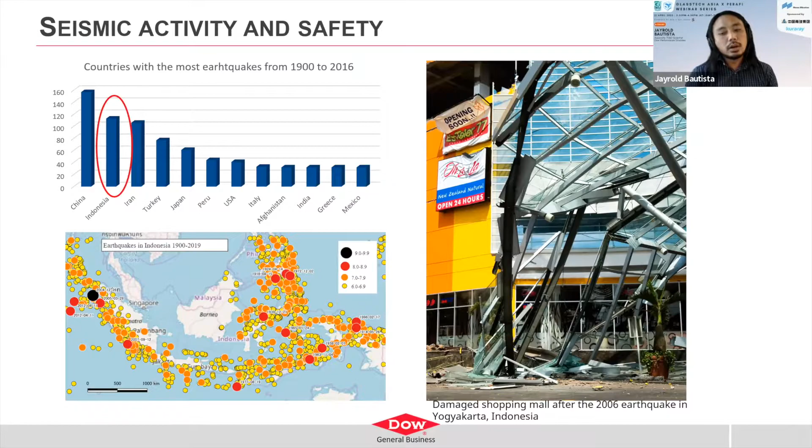And truly, in modern times, there has been less and less major building collapse, especially in the urban areas. But still, we have to look at not just the main structural components, but also the non-structural components, like the facades, because they can also have some damage during earthquakes, just like what you can see in the slide right now, wherein you can have visible damage on your facade. You're talking about gasket dislodging, maybe glass dislodging as well. You have glass breakage or glass cracking, and sometimes even some glass falling from the facade itself. So these are some of the things that you should be looking at as well, and not just the main components of your building.

Now, if you look at the seismic design of the building, the weight of a structure that you are designing for seismic is directly proportional to the seismic loading that it's going to have. Building structures are heavy, and the response is influenced by complex vibrations. A lot of the main structures right now are concrete, and concrete is not really a very good material for seismic design. So typically you'll go to technology, let's say some dampers, to make sure that seismic loads are better managed.

Now, the glass facade, relative to the main structure, is lightweight, and it is influenced by the building's main structure when it comes to seismic loads. With seismic loads you'll have the in-plane loading, and also the out-of-plane lateral loads. These loads are coming from the P waves from the earthquake, which make buildings shake up and down. And earthquakes will also have their secondary wave, or S wave, which makes buildings sway from side to side. So you can imagine how these waves are going to interact with your main structure and how they're going to affect your facade.

Now, the main idea about seismic design for buildings is that you should isolate the facade from the main structure. So how would you do that? You will design your facade joints to be able to accommodate those movements when there's a seismic load. And then also, of course, your connections. You're going to have some slippage on your connections to ensure that there is that isolation of your facade from the main structure. Now, the other thing, of course, is that you put those theories to the test.

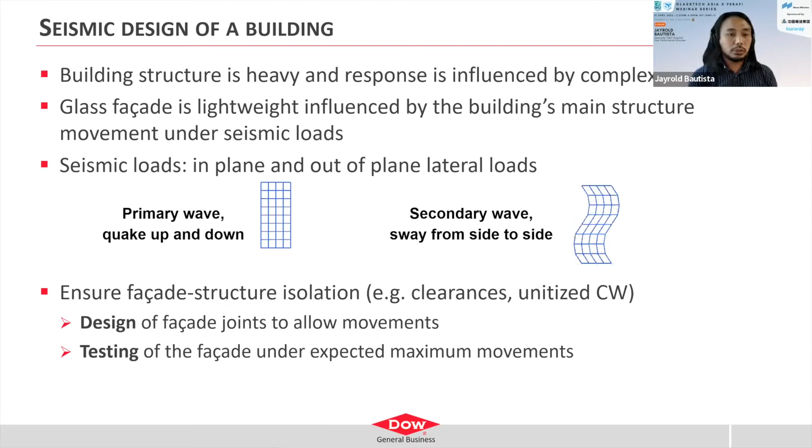So it's also very good that you would put or test your facade under those expected maximum movements so that you'll be able to mitigate those assumed loads that you have regarding seismic. We can look at the design codes, and Valerie can talk about the design loads for the United States and also for Europe. Yes, indeed, Jayrold.

So there are different building codes that can consider seismic action. In the US, we have two such important documents. It's an area prone to earthquakes. We have the American Society of Civil Engineers standard that calculates the horizontal force on the non-structural component and assesses the glass fallout seismic drift, so the displacement that needs to be larger than a certain limit.

Then we have also the AAMA, so the American Architectural Manufacturers Association standard, the 501.6. It's an often used testing standard that we use a lot within Dow. It's characterized by the excitation type on the bottom left of your screen. So you see it's a monotonically increasing amplitude, sinusoidal drift cycle, and it determines the serviceability and the ultimate drift limit for the glass.

The way it's tested is based on a worst case scenario. So you're going in your mock-up to choose the largest glass, the thinnest glass, the most fragile one, the smallest clearances, largest drift index, and so on. And then with this test, you can assess different key design elements of the curtain wall system, such as the SG joints, so the structural glazing joints, the drift, and of course, the primary objective is to determine if we have a glass fallout limit that is within the tolerated value.

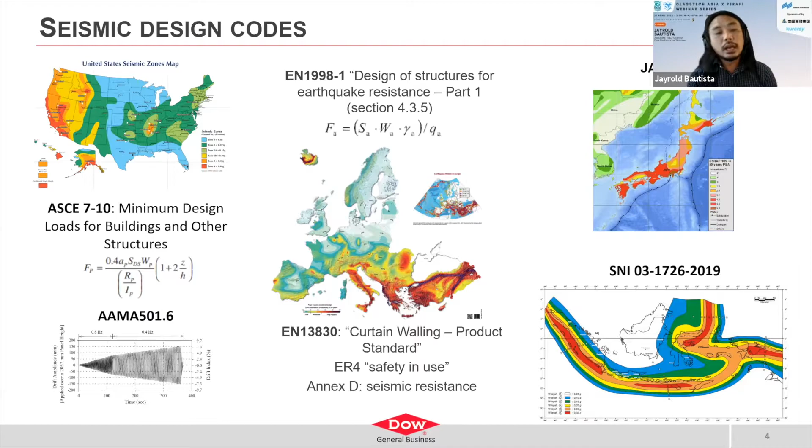Right, and now going more towards Asia, so some of the more popular ones, we have JASS 14, which is from Japan, and it's for curtain wall itself, and this one talks about levels of deformation on the facade itself, depending on the strength of the earthquake. And then if you look at more locally here in ASEAN, for Indonesia, we have SNI 03-1726, and I think the latest version is the 2019 version, and a lot of this loading is based on ASCE 7 as well.

We look at the different systems used for glazing. One of them, of course, is captive systems. Now, the more inflexible our facade system is, the more potential it is for damage due to seismic loading. So damage typically happens when there is incompatibility between movements of your building versus the movement capabilities of your facade. So for example, if you don't have enough joint widths to accommodate those movements, if you do not have enough slippage, as I mentioned a while ago, in your brackets, in your facade itself, it's gonna cause some problems for your facade.

So if you look at glass itself, if you have framing members and you have a system that is rigid, your glass is very prone to impact from the framing systems on the edge. And because of that, you may have some glass cracking, or even worse, you may have some glass breakage as well. So if you look at all of this loading, you have your out of plane loading, you have your in plane lateral loads for your facade, and truly one of the good things about modern times.

Now there's a lot of buildings that use unitized curtain walls, and unitized curtain walls are very good when it comes to accommodating, of course, provided that they are designed properly. If you look at unitized curtain walls, the P waves of an earthquake, so that up and down shaking from that earthquake, that's taken care of by the stack joint in your unitized curtain walls. Your out of plane loading is taken care of by your rotation in the mullion area, in the brackets of your curtain wall.

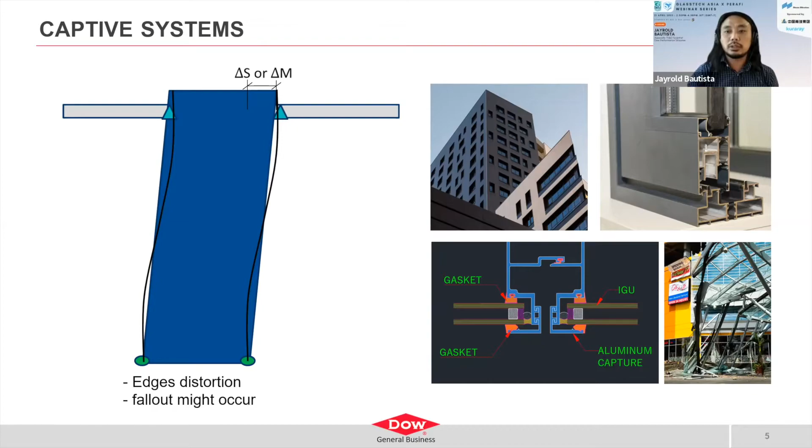So as Valerie will show on the next slide. Yeah, indeed, silicone structural glazing or bonding offers you a very interesting movement accommodation capacity that can really contribute to improve the performance of a curtain wall that is exposed to seismic activity. And that can be related to the structure itself of the silicone.

So we have extra flexibility in the glazing perimeter. We can reduce the stress concentration in the glazing and really distribute the stress more homogeneously. Another benefit is that our modulus in shear is typically less than in tension. So it means that you are going to accumulate less stress in those shear deformations than in tension, which is also a benefit.

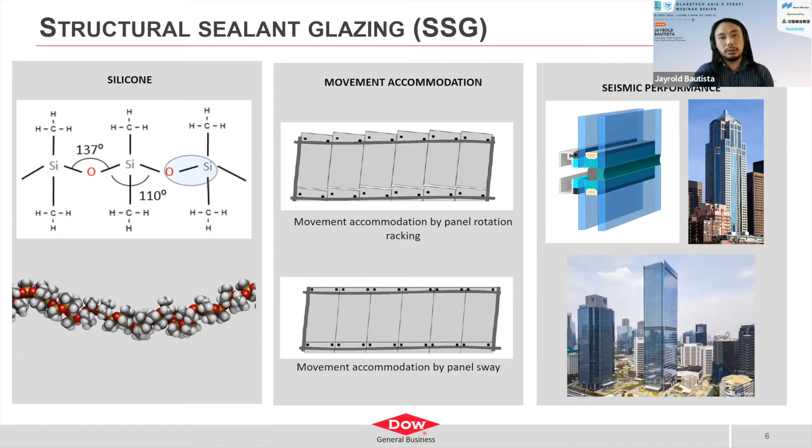Our understanding of the seismic performance of our silicone structural glazing and our efforts to expand our knowledge date back quite a long time. We started evaluating that back in 1996, evaluating small test pieces, H pieces, T-A joints, and also did quite some post-seismic building inspection. Based on this early evaluation, we defined a design stress of 0.35 megapascal, 50 PSI, for specific Dow silicones, and also a 25% design strain for some products.

To further understand the seismic behavior, we expanded experimental testing in 2011, related to a real project. You can see in very small characters the reference study that you can consult on the internet. Here again, we combined small-scale experimental observation and larger testing according to the AAMA standards. We have a four-sided structurally glazed curtain wall unit, a unitized system. A unitized system, as Jayrold explained, is normally structurally discontinuous from level to level, decoupled from movement in the adjacent floors.

But in this project, we decided to look at a worst case scenario. We assumed that the unitized system would not behave as intended in sway, with panels that slide in plane at the horizontal stack joint and keep a rectangular shape, but that there would be some malfunctioning and we would have a stick-built system with the glazing frame continuous over multiple stories, so that we have racking under in-plane story drift, meaning that under this in-plane lateral load at the top of the panel, we see deformation in the shape of a parallelogram.

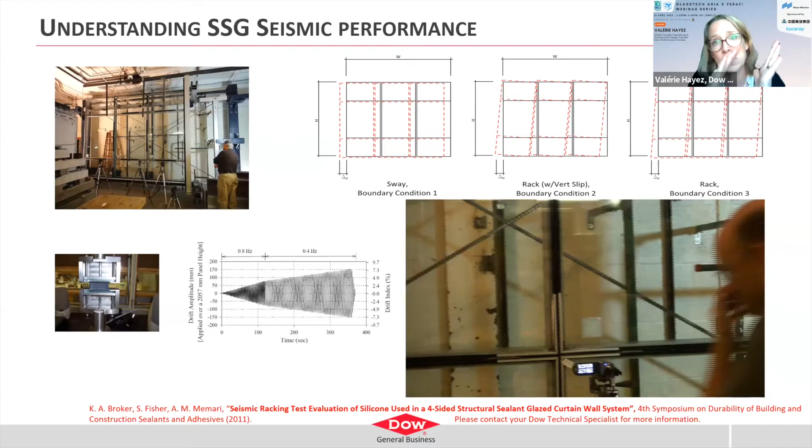Logically, this racking is going to transfer larger strains to the structural sealants, but that would show that we would also fulfill in the normal utilization in the sway mode. So here on this video, you can see more details. We have the sway condition, we have the racking condition.

The sway was less severe as anticipated. We confirmed that the allowable design limit for movement capacity was good. We only observed damage to the sealant after the glass fallout limit was reached. And for a unitized system that would work correctly, we do not anticipate any damage tearing at this target drift.

Now, how do we perform any evaluation of a project that needs to comply with seismic performance? We'll start first with dimensioning our joints for wind loading, assuming normal.

Can you go back to the before, Jayrold?

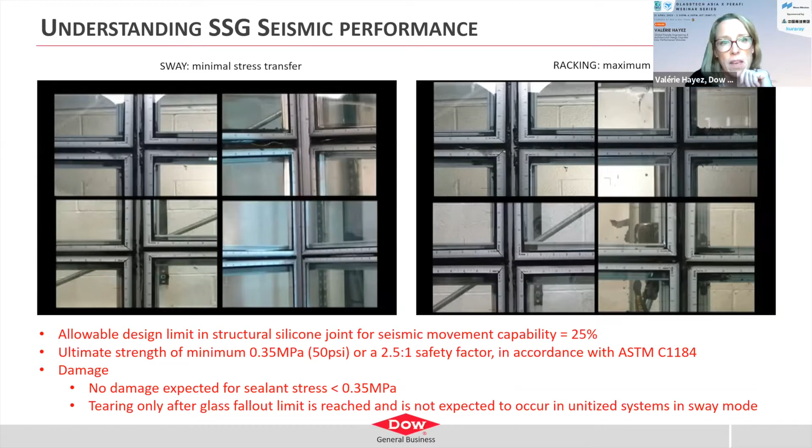Assuming normal 20 psi or 0.14 megapascal, and then we need to ensure it can take all the deformations that are anticipated for seismic performance. And that is data that we are not calculating. It's provided by our customers. So they will design facades for the seismic movement, and then we will look at being able to accommodate that movement.

Now, on the next slide, we can see how we are further expanding our knowledge today, because you can imagine that this type of large-scale testing mock-ups is time-consuming, it's expensive, it does not allow you to evaluate all the possible configurations. For example, doing a parametric analysis to understand the influence of the joint dimensions, the aspect ratio, and other parameters, it's just impossible.

And in the meantime, since 2010, we have seen a lot of progress in terms of finite element analysis and use of this to better understand the limits of our material. We have been using that successfully in other applications. We are looking at cold bending, at bomb blast, and we are also now applying this for seismic performance.

So the idea is, again, that we build some small-scale experimental test results. We build a hyperelastic accurate material model with the proper meshing. We validate that we can predict what we see experimentally on a small scale, and then we repeat that exercise with one large scale. And once the model is validated, then we can run all the parametric analysis that we want.

So what we have seen in the first validation of the large scale here of the AAMA test is that we think that the tearing is going to occur when the strain reaches a certain ultimate value in the joint, and that fallout will occur when the tensile or shear stress reaches also a strength limit.

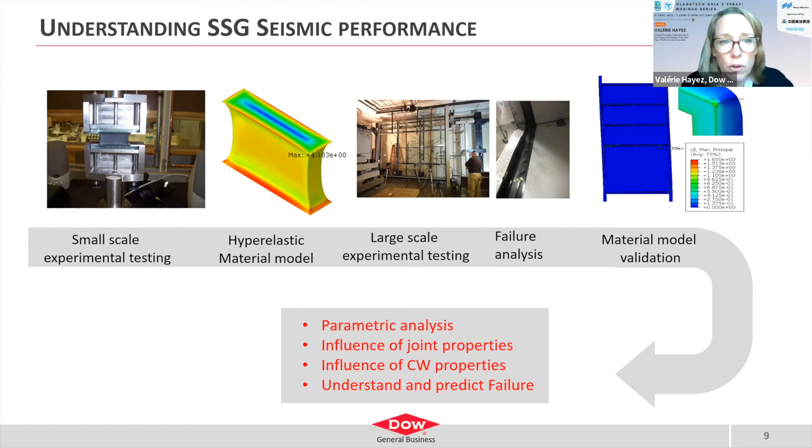This is a preliminary result because we have in this specific case a joint that has an L shape, and this is not the most common. So we are currently building more large-scale experimental tests with a rectangular joint of a few dimensions. We are going to model that, and once this is done, then we'll get to really a full parametric analysis.

So we are also working together with Marie Curie individual fellowship research projects, together with leading technical universities in facade and in seismic design. So we have the Dutch University of Delft, and we have the Italian University of the Sapienza in Rome, as well together with the well-known facade contractor Permasteelisa. So it's a project duration of 2 years. It's going to end by July 2023. It's led by Dr. Simona Bianchi, and the project is following a similar approach.

So we have a lot of mock-ups that are going to be experimentally assessed, not only on the base of seismic performance, and repeated seismic performance, but also assessing what we mentioned in the beginning of watertightness, airtightness, so really the functionality after a seismic event. And that will then be gradually increased until we reach failure for the different systems.

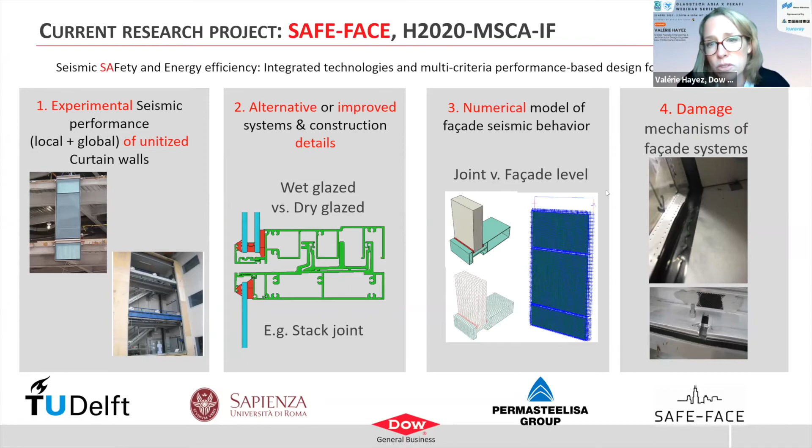They are going to change details of the system, for example, the stack joint, but also of the joint dimensions. So we have really a maximum of experimental results that will then be modeled with finite element analysis again, so that we understand all the different parameters. And again, there will be, of course, a big attention dedicated to understanding how the damage is occurring in our silicone joint, but also in the elements of the system.

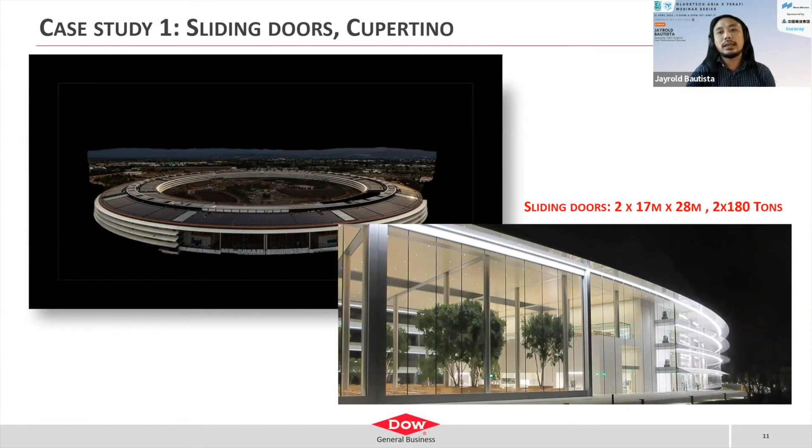And we're looking here at the sliding doors, and these sliding doors are 17 meters tall by 28 meters wide, and a total of 180 tons. And this structure being in California, it's very important that these are tested for seismic performance. Now, these doors, as you can see, they're huge and they're really heavy. So it's very difficult to do the test like what Valerie has shown a while ago.

So of course, we can do some FEA, but the team that was doing this decided that they want to do a mock-up, a smaller version, that will still be able to simulate the movement that the sealant joint will have in the event of an earthquake. So right now, you can see we're using here one of our products, 993 structural glazing sealant. It's a 2-part structural glazing sealant.

So what they did, you can see there's the glass there. They keep on putting loads there, and then this joint, as you can see, just keeps on deforming, of course, because of that loading. This joint actually is around, I think, 24 by 30, if I'm not mistaken, 24 by 30. That's the dimension of that joint.

So as you can see, what happened here was they keep on adding loads to this, to simulate that seismic loading on this glass and on that joint, and the glass broke even before the sealant actually failed or broke. So again, you can see that the sealant was able to accommodate those movements coming from the seismic load based on this particular mock-up.

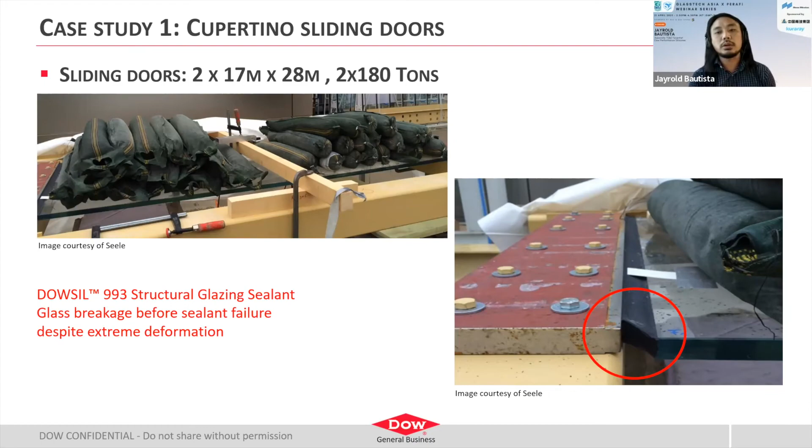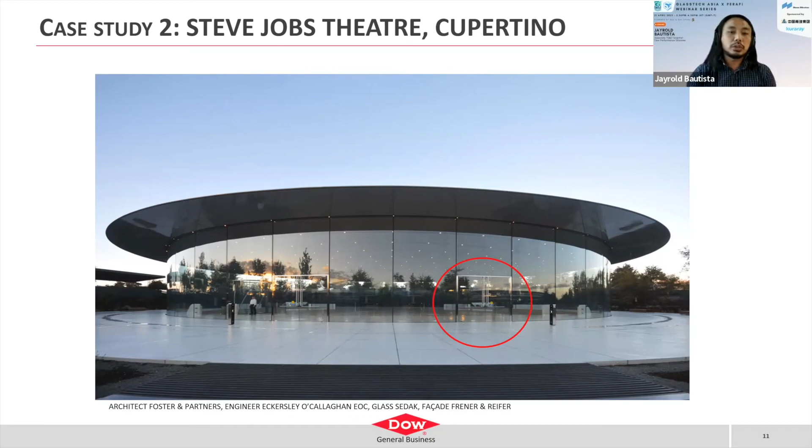Then we go to another very prominent project, which is the Steve Jobs Theater, also in the same area. So this project, as you may know, the concept is full clarity as much as possible. There's no column, there's no mullion, very lightweight looking. So all you have is this glass and this carbon fiber roof that you have at the top. So they wanted to do a seismic performance test here on that door.

So as you can see the swaying from here, you can see how extreme that movement is from that particular video. And in all of these extreme deformations or extreme conditions that you can see here, the sealant was able to handle all of those movements from that swaying.

Now, one thing we would like to emphasize here is that we are showing you a detail of the glass wall here. And as you can see, there's no column, there's no mullion. So everything, the sprinklers, anything that usually has to go in those areas, actually went inside this joint here. You can see there are 4 layers of glass here. And the idea here is that this was possible. This is not a very usual design.

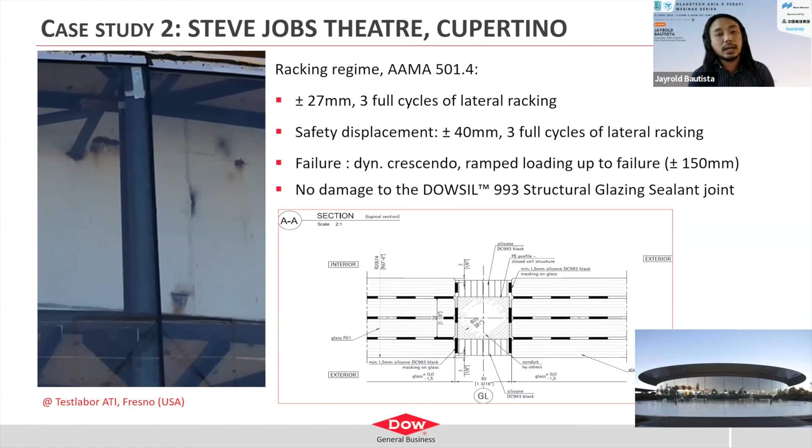As you can imagine, the key thing here is that during the project, they engaged us early, and that engagement allowed us to agree on design, to be able to test those designs, and to be able to come up with the architect's vision on this particular project. So the key thing there is that if you have designs that are unusual, you can engage with us early, and we'll be happy to discuss those designs with you.

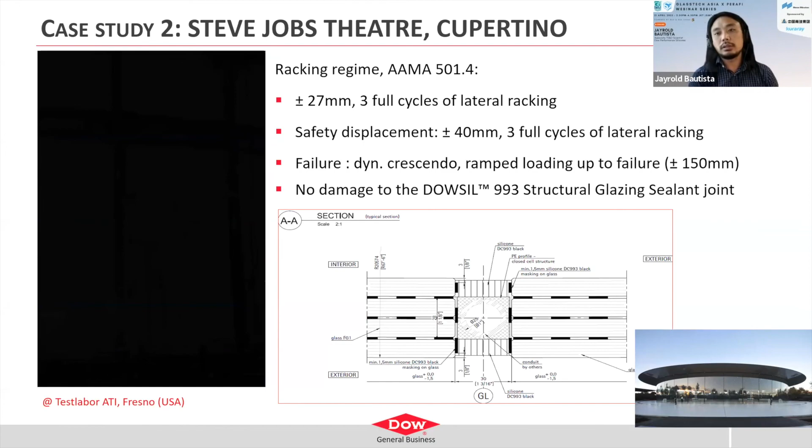So I hope this presentation has given you some useful insights into the contribution of silicone structurally glazed facades in seismic performance, and that the way they are behaving is really a big advantage for this application. So as Jayrold said, we are really very keen to collaborate for successful facade design. It's really important that you engage early on whenever you have challenging projects, so that we can really optimize the performance of our materials and make sure that our buildings will remain standing tall despite these types of events.